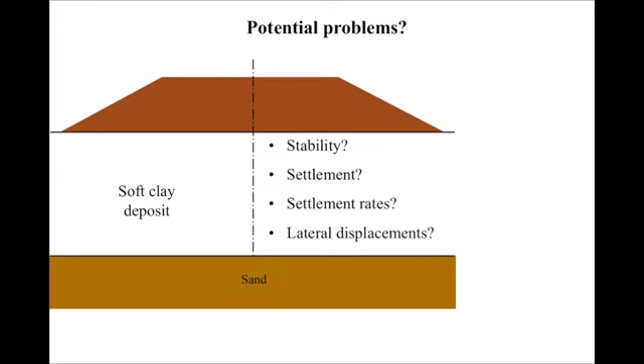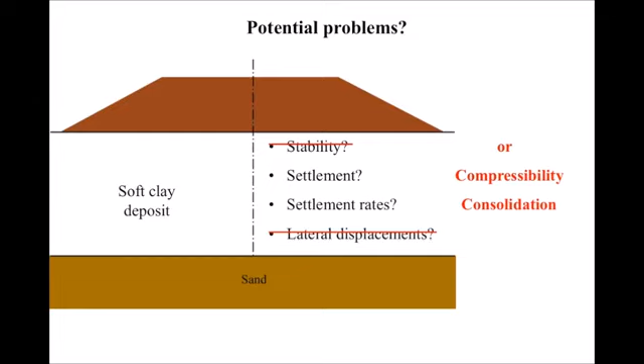As introduction, the problems associated with embankments on soft clays are essentially stability, settlement rates, and lateral displacements. For this presentation, we talk only on settlements and settlement rates, in other words, compressibility and consolidation.

Usually, the compressibility of clays is represented in an e log sigma prime V diagram, characterized by the pre-consolidation pressure, defined by sigma prime P or sigma prime Vy, and essentially the compression index C sub C.

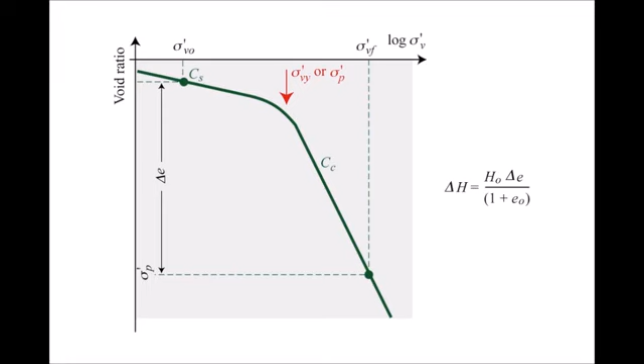With time, when we load a soil, there is some settlement, some decrease in void ratio associated first to pore pressure dissipation, that's primary consolidation, but then settlement continues during secondary consolidation. This secondary consolidation is characterized by C alpha e, the slope of the curves in an e log T diagram.

The general equation for one-dimensional consolidation is shown here on the right, and it shows that the strain rate is directly related to the pore pressure, which means that if we have movements, settlements during secondary consolidation, there are still excess pore pressures. They are small, but still there.

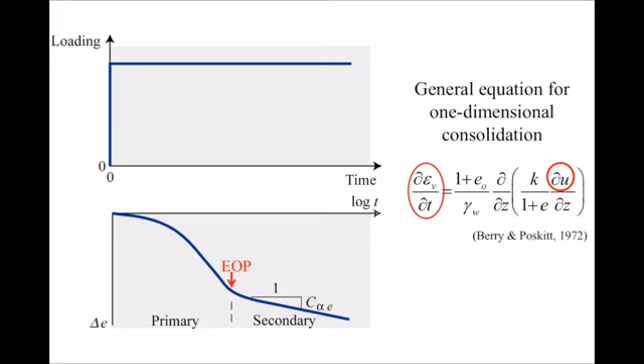Laboratory conditions: Mesri and co-workers have demonstrated that C alpha e is proportional to C sub C for a given clay. Here, the ratio is 0.03 for these two clays.

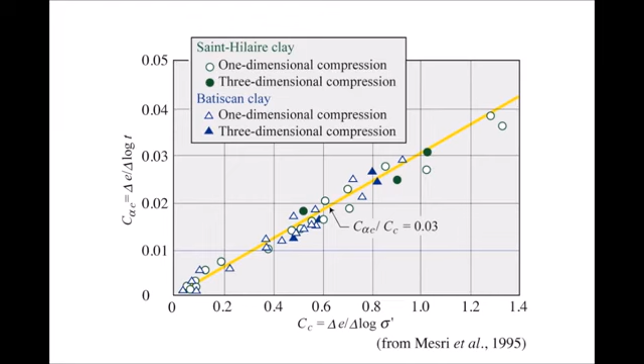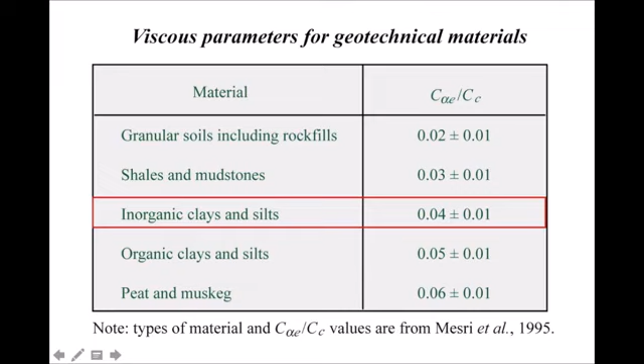They also have shown that for inorganic clays overall, this ratio is always equal to 0.04 plus or minus 0.01. For granular soils, it's smaller, but for organic soils, it is larger. So this is an interesting characteristic.

Now a few words about the CRS, constant rate of strain oedometer test, because I will refer to this test and maybe some people are not familiar with it. We have a specimen in an oedometer cell, which is loaded on a triaxial press at a constant rate of strain. The objective of this test is to get a compression curve within about 2 days.

The advantage of this test is that the stress-strain curve is continuous, so the pre-consolidation pressure is well defined. In this test, we measure the pore pressure at the base of the specimen, UB, and the vertical effective stress is equal to sigma V minus 2/3 of UB.

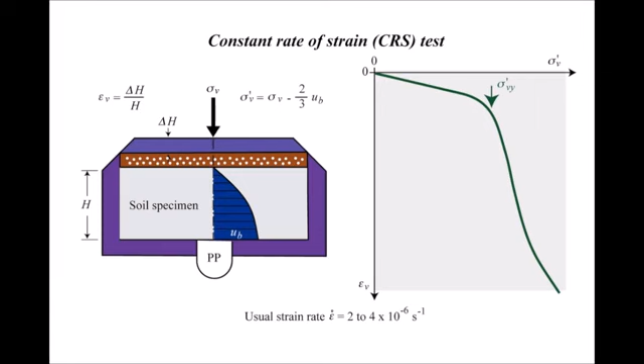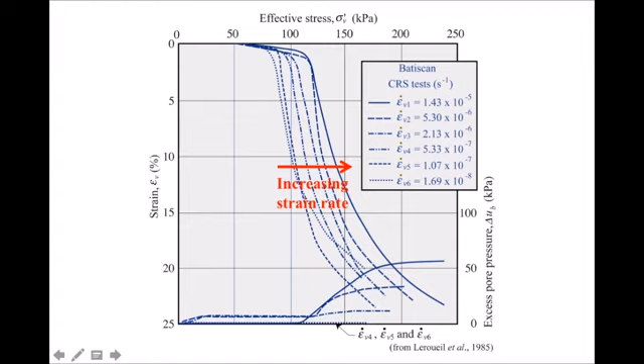So from this set of curves, what we call isotaches, which are relevant for step loading tests as in a conventional oedometer test, it can in fact be shown that this set of curves can be described by two curves. One shows the log of the pre-consolidation pressure, or vertical yield stress, versus strain rate, and a normalized effective stress-strain curve in which the vertical effective stress is normalized with respect to the pre-consolidation pressure associated with the strain rate.

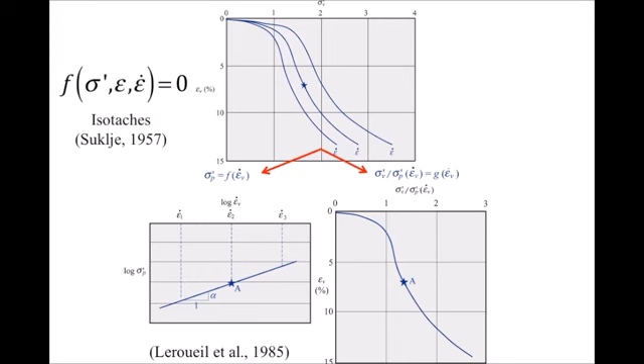The slope in the log-log diagram can be defined by alpha. In fact, we can show that alpha is equal to C alpha epsilon over Cc. So for inorganic clays, for example, C alpha over Cc, or alpha, is typically equal to 0.04. What does that mean? It means that the change in effective stress when we change the strain rate by one order of magnitude is typically 10%. Remember this number. It is smaller for granular soils and larger for organic soils.

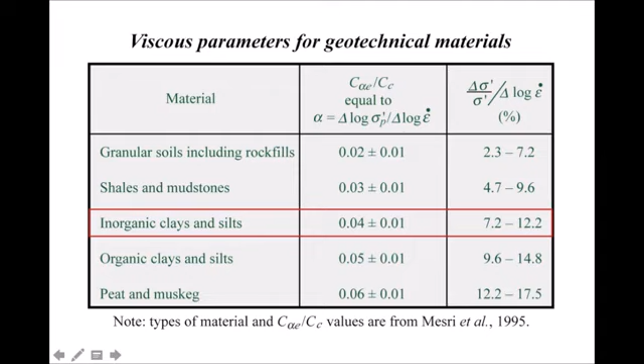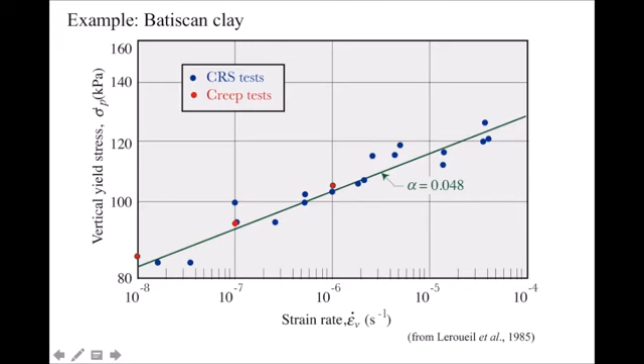This is an example on Batiscan clay, and you have here the vertical effective stress, or pre-consolidation pressure, versus strain rate in log, and alpha is equal to 0.048 in this case. These are, for the same clay, normalized compression curves, and you can see that all the data, except these two which were obtained at too large strain rates and which gave too large pore pressures, are otherwise in a small range, considering that we are working with a natural clay.

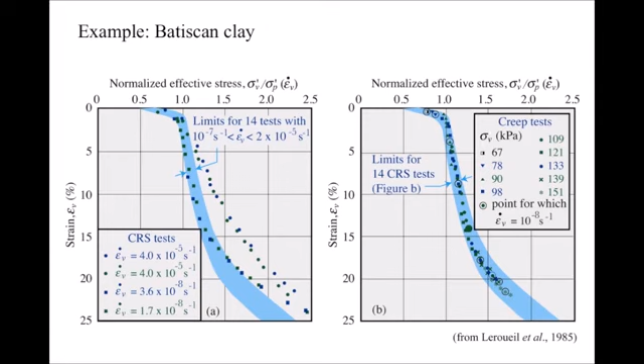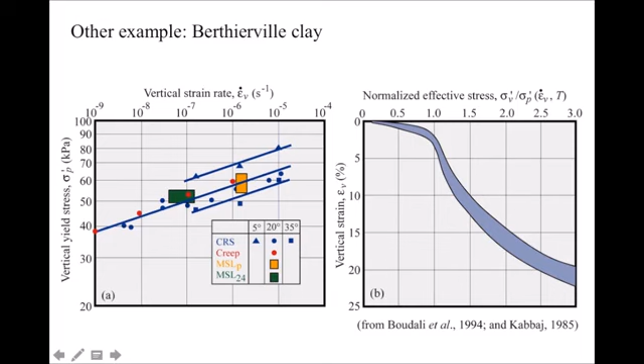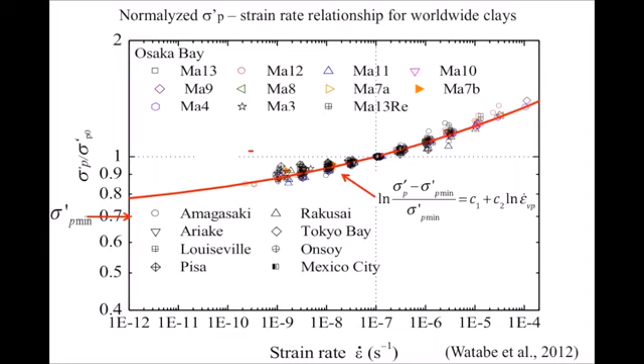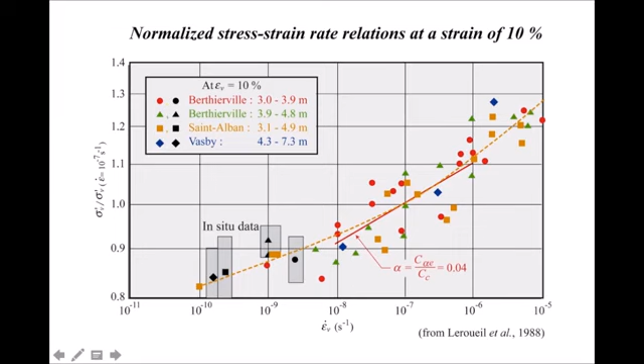In fact, we observed this earlier, and you can see on this data that alpha is equal to 0.04 between typically 10 minus 8 and 10 minus 6, which are strain rates usually obtained in laboratory tests, but that at larger strain rates the slope is larger and it is smaller at small strain rates. This is what I just said, and it is consistent with what is shown here.

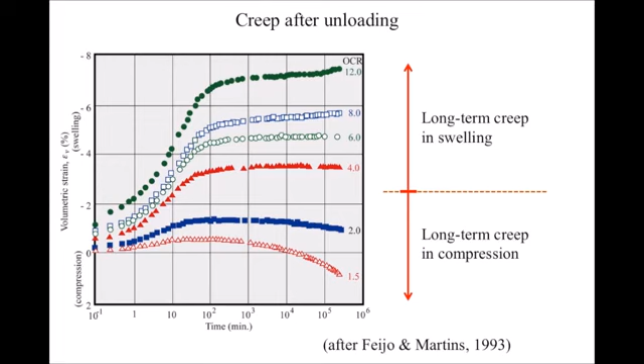So, in fact, the strain rate model I was talking about before can be generalized in this form here, where we have secondary consolidation, but below an indifferent equilibrium somewhere here, we have a secondary swelling. So that means it is a kind of generalization of the stress-strain rate model.

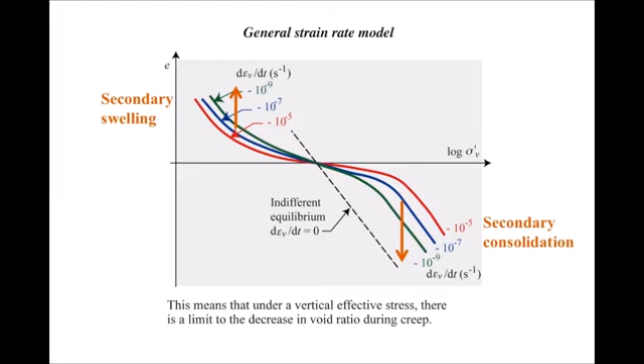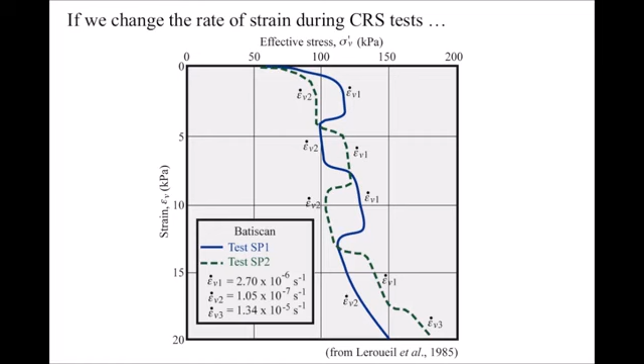Practical implications of the strain rate model in laboratory conditions. First, if during a CRS test we change the rate of strain, we move from one curve to another curve. This is shown here where you have two strain rates that have been used, epsilon dot V1 and epsilon dot V2. That is logical with the strain rate model. Now, if we come back to the CRS test, I told